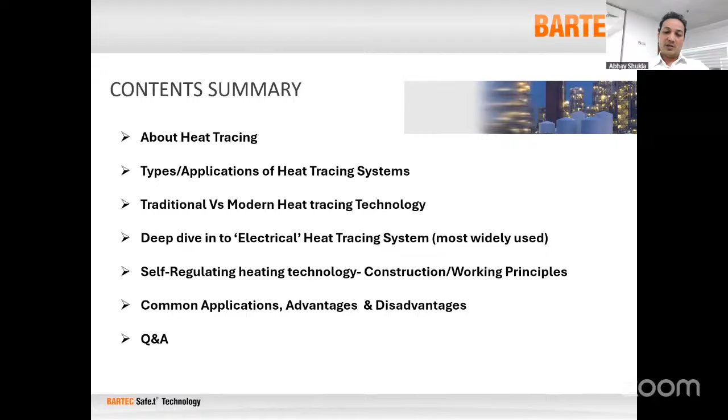So whatever heat is lost to ambient is compensated with the heat tracing system. As you know, there are many ways heat is lost to ambient: by conduction, by convection, and by radiation. Generally, when it comes to any process, like oil and gas, petrochemical, or whatsoever, when the process is under operating condition, generally heat loss doesn't happen, or it happens very negligibly. So there is no need to compensate that heat loss because there is practically no heat loss.

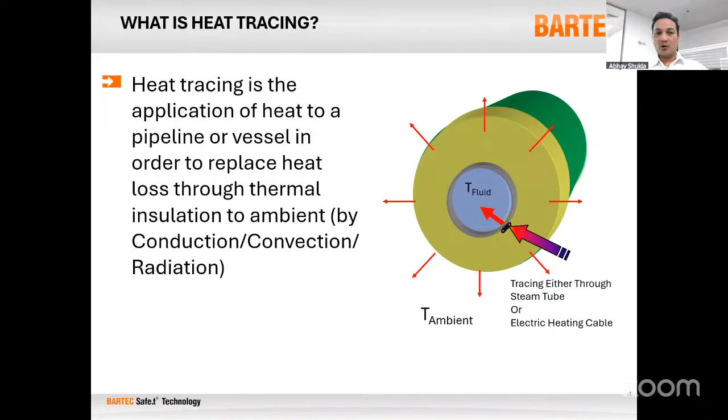Then the real problem comes for the process operators. That's where heat tracing comes into picture. So why is heat tracing necessary? It is necessary to compensate or replace the heat lost to ambient, and to maintain the fluids or gases inside the pipelines, vessels, or tanks at a desired temperature level, so as to avoid freezing and thickening of fluids.

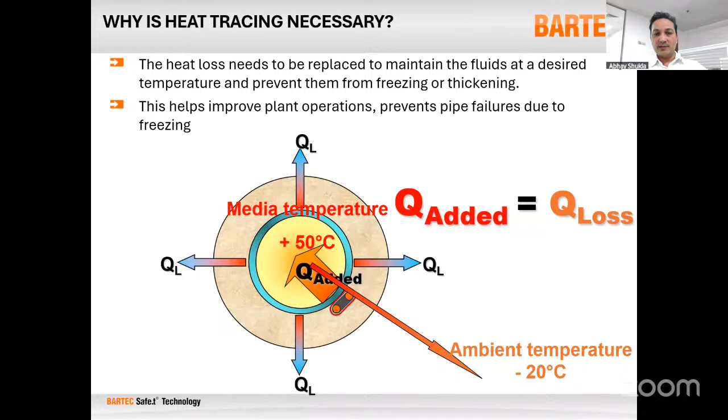So the ultimate purpose is basically to improve plant operation, to prevent piping failure due to freezing or any reason whatsoever. Now we'll see what happens with the process pipe over a period of time. These are two pictures which will give you a glance about when any pipe or equipment is heat traced or when it is not. With this, you can see a clear difference. When the process pipe is not heat traced, the heat is gradually lost to ambient and the temperature gradually comes down to ambient level, so the fluid becomes solidified, maybe within a few hours only.

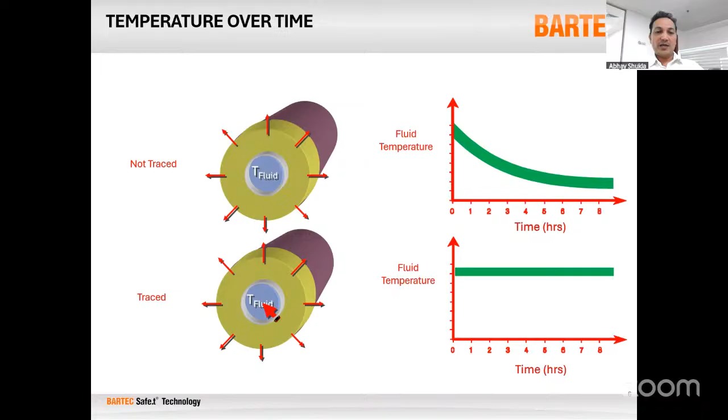But if we are providing a heat tracing solution to the process pipelines, then the heat tracing system keeps on maintaining, by compensating what is lost to ambient, the temperature throughout the operation. So it is ensured that the same temperature desired to keep the fluid in flowing condition is maintained throughout the operation. That is the whole purpose. So you will understand the uses of this heat tracing system and how critical it is when it comes to maintaining the operation of any plant, whether oil and gas refineries, any industry, petrochemical, pharmaceutical, or otherwise.

Heat tracing is not complete when there is no insulation, because no matter how much heat you provide from outside, if there is no conservation of the heat, it will be lost to ambient. So insulation plays a very important role in this - it actually preserves the heat. Whatever heat you provide to the process pipe or equipment is protected with the insulation.

With this chart, you will easily understand the difference between providing thermal insulation on a heat traced pipe versus not providing it. If it's a bare pipe with no insulation, the heat loss for a typical 2-inch pipe maintaining 55 degrees C, with ambient at 0 degrees, will be approximately 500 watts per meter - even if ambient is 20 or 40 degrees, heat loss still occurs since ambient is less than the required temperature. Eventually the pipe temperature will reach ambient temperature. Within a few hours, the pipe will become colder and the fluid inside will solidify.

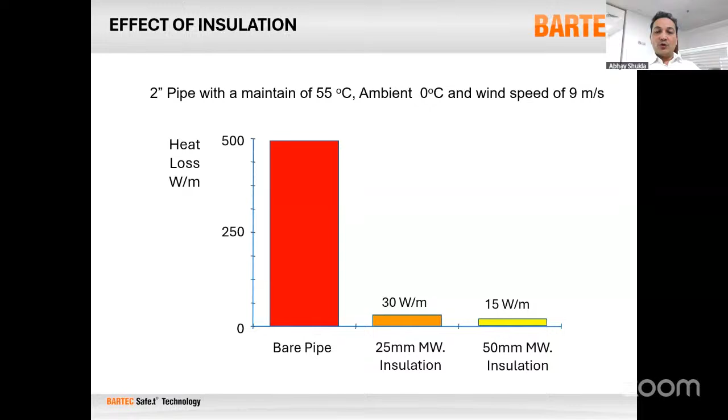But as you know, there is no insulation that prevents heat loss 100% - there is no perfect insulation in this world. There are different insulations we use, but even with insulation there will be some nominal heat loss, because of the K value of the insulation. Even with a good insulation like polyurethane foam (PUF), the K value is around 0.022 watts per meter degree Kelvin. So there will eventually be heat loss happening - it will be very slow, but after a few days, because of that nominal heat loss, the pipe temperature will gradually become the same as ambient temperature. But thermal insulation obviously plays a very important role - it prevents heat loss and reduces the requirement of heat tracing to a major extent.

How do we calculate heat loss? There is design engineering involved in this - how we determine which heating system to use, and how much heat is required to compensate. For that purpose, we need to calculate the heat loss from any surface. There is a formula: 2 pi k delta T, where T is process temperature minus ambient temperature equals delta T, divided by the natural log of d2 upon d1. d2 is the overall diameter over the insulation, and d1 is the pipe diameter. So the thickness of the insulation matters a lot in this calculation.

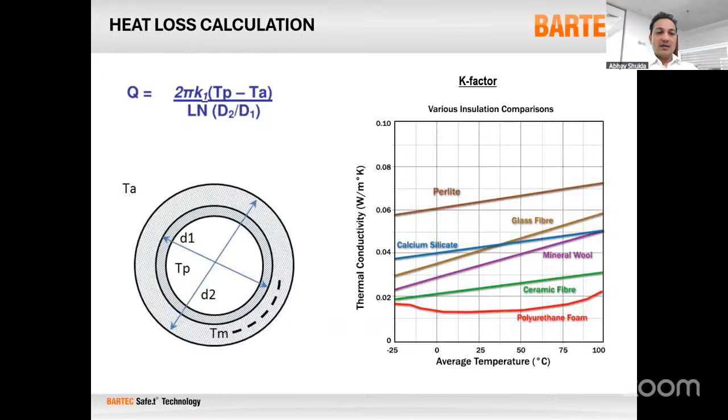Now, what are the applications? There are different uses for different mediums. For liquids, the purpose is basically to prevent freezing and to reduce viscosity so as to keep it flowing. For powders, the purpose is to eliminate condensation from the walls of equipment that could potentially clog the pipelines. And for gases, the idea is to prevent formation of hydrates. So for different mediums, there is a different objective for heat tracing applications.

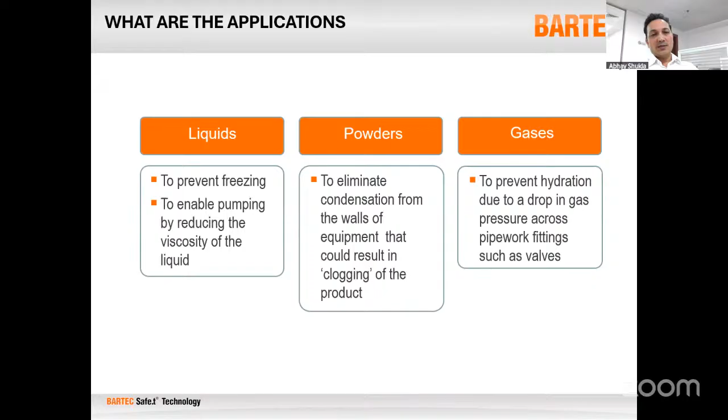So we choose the application and choose the system based on the requirement. Now I will give you an example of some market sectors where all these special applications are used, mainly in oil and gas. 70 to 80% are used in oil and gas sectors, especially in upstream, midstream, and downstream operations everywhere, be it storage terminals, refineries, distributions, and transportation.

Because when we talk about crude oil, let's take one example to make it more clear. Crude oil, which we often hear about from media and news channels, is something at, let's say, 60 degree C temperature. The viscosity is less, so it's very easy to pump it and transport it from one place to another. But when the temperature goes down from 60 degrees C to 50 to 40 degrees C, it starts becoming viscous, so it becomes very difficult for plants to pump and transfer it from one place to another. So it is extremely essential to keep the temperature of crude oil always above 50 degrees C, bare minimum. So 60 is ideal, but minimum 50 is desired.

So if you want to maintain the temperature at 50 or 60 degrees C, there has to be a system to keep it at that same level, right? Because depending on the location, if it is India, the least temperature we experience is maybe 5 or 10 degrees. But for colder countries, this goes to sub-zero temperature. So for different countries and applications, the requirement changes and becomes more complex, probably requiring more heat to compensate. But the desired temperature always remains the same depending on the type of application.

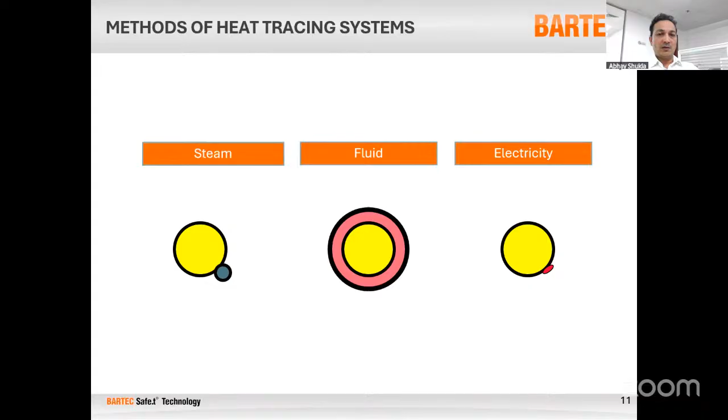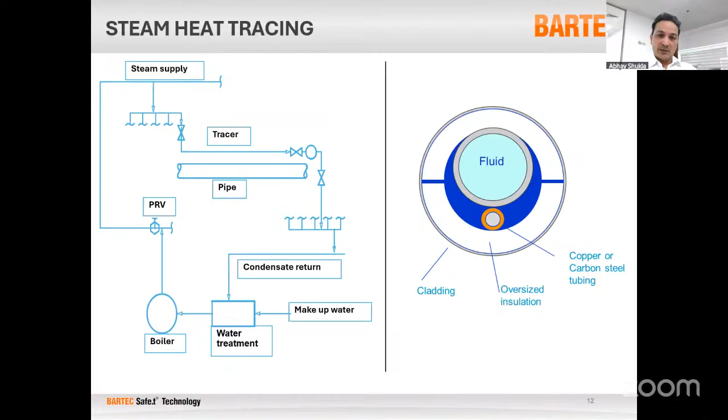And the typical arrangement is like, on the process pipe we attach a copper or carbon steel tube, which is welded or strapped to the mother pipe, and within that process tube we actually pass the steam. There is thermal insulation on top of the pipe as well as the tube to protect the heat. So that is how the typical arrangement is.

And with steam heat tracing, as I mentioned, there are so many disadvantages rather than advantages. As in the picture you can see, heat transfer is the major concern in this case, because the heat transfer coefficient really cannot be precisely calculated, how much heat is being transferred to the mother pipe from the steam pipes. So it becomes really challenging for the engineering person to calculate how much heat is required and how much is actually being transferred.

Apart from this, steam is useful only in cases where it is easily available as part of the process. Where steam is not available in the plant, it becomes even more difficult to create new infrastructure to generate steam. And as mentioned, steam is not useful for maintaining narrow band temperatures. It is probably useful for medium and high temperature applications, but not if you want to protect something from freezing, where you need to maintain just 5 or 10 degrees. You cannot do that with steam, so it becomes a real challenge to find a solution for that.

The disadvantages are many: it is difficult to control, cannot be very precise, it's very complex, and condensation, drain back, and water quality are all issues. As mentioned, there is high installation and maintenance cost and high risk of injury, because steam can be at more than 190 degrees C, and it's very prone to leakage and accidents.

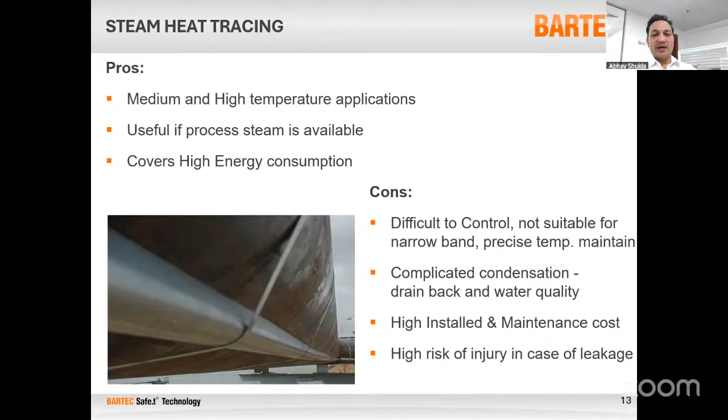So it becomes very risky to handle steam. That is why this system is now obsolete. No industry is now using steam heat tracing systems to maintain process temperature. Only where they already have steam available do they somehow utilize it for maintaining process temperature, otherwise it is wasted. Otherwise, this technology is obsolete everywhere.

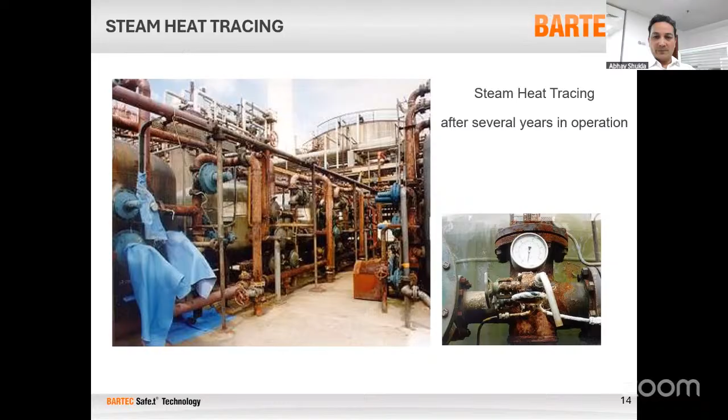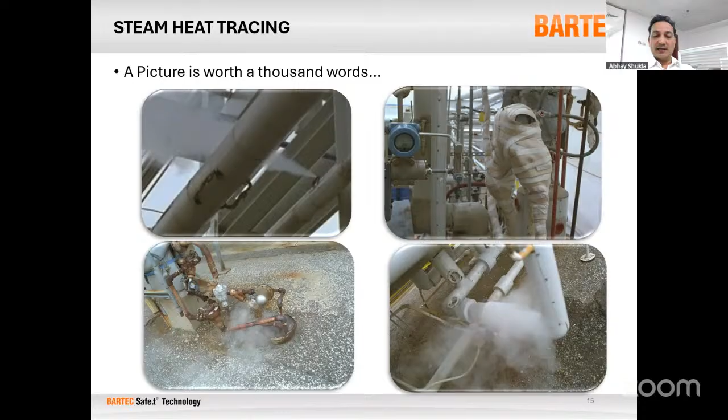Here are some pictures, real pictures taken from the sites. A picture is worth 1,000 words—you can understand how difficult it is to contain, right? Somehow people are managing it, but whenever we visit any customer, we try to convince them to use electrical heating technology, which is the latest in today's world. Here are some more pictures which will give you an idea of how difficult it is to maintain and live with a steam tracing system.

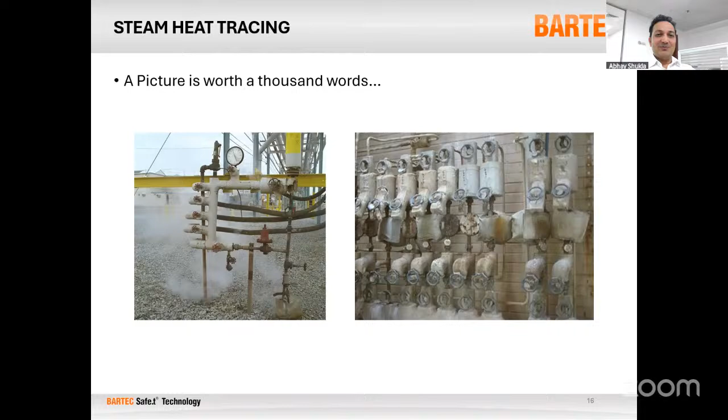Now we'll talk about the hot oil system. This system is totally obsolete—nobody is using it. But just to throw some light on it, let me mention the typical pros and cons. This works through hot oil. The heat transfer coefficient is probably better than steam, but it's very difficult to handle the oil in day-to-day operation. There is also the possibility of it solidifying and becoming viscous, so it's very difficult to handle the oil day-to-day.

So practically it is not possible, and that's why people have stopped using it. Again, precise temperature maintenance is very difficult in this case, and it is not environmentally friendly at all. There is leakage risk, injury risk, and expensive, complex equipment. So this system is no longer used—I would say hardly 1% of industry is actually using this kind of system.

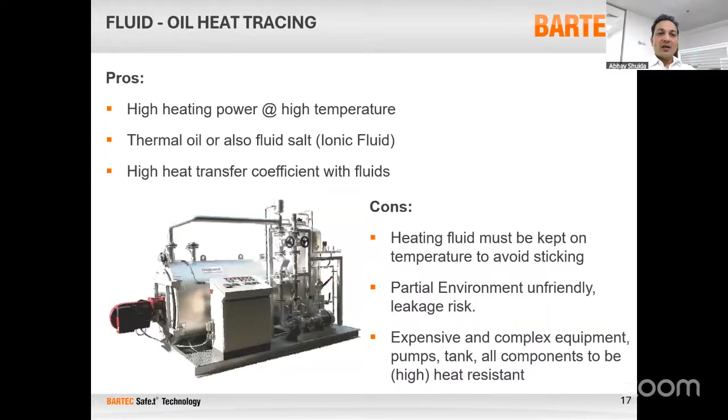Now here comes the electrical heat tracing system, which is the core of this particular session. We will talk about the electrical heat tracing system in detail. We'll try to understand what the components are in this system, how it works, what the technology is, and how it is economical compared to the other two systems. Basically, the electrical heat tracing system consists of not just one particular product—it consists of many products and systems together. That is why it is called a system, not a particular product.

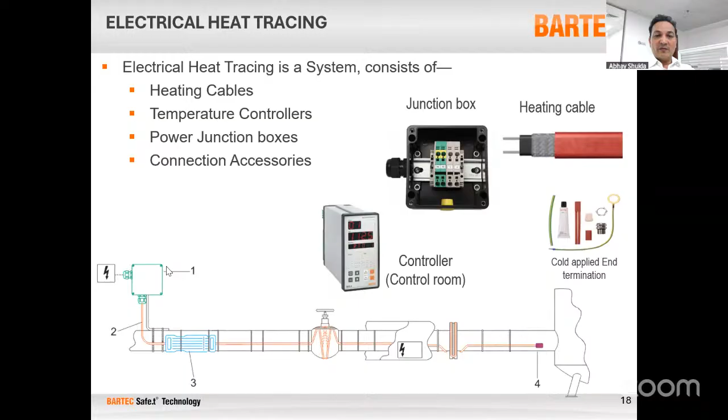Electrical heat tracing consists of the heating cable, which is the main component of the system, followed by the temperature controllers. The temperature controller depends on what kind of temperature we want to maintain in the system and how precise we want to maintain it. Then, of course, power junction boxes, which are required to feed power supply to the heating cables, and connection accessories. This is a broad overview of how the system looks.

You can see here there is a process pipeline with valves and flanges. Then we place a junction box on the pipe itself, which is to be heat traced. This is the pipe which is to be heat traced, and we place the junction box there.

Take out the heating cable. It's a flexible cable, so it's quite easy. You can cut it to whatever desired length you want, and then wrap it around throughout the pipe. And by using an end seal, you can terminate the circuits, and there you get indication through a light whether the circuit is on, off, or faulty.

So you can monitor as well in real time. There are so many systems where you can monitor the real time temperature of the pipeline, set the point of the process temperature, and control the system through DCS or control rooms at one place. And there are so many systems available nowadays where you can install software on your PC and monitor your entire process, entire plant remotely from one place, and give a command to control or trip the circuit remotely.

So on a real time basis, you can monitor the temperature, do health analysis of the entire system, and actually predict the maintenance requirement for the system. Although a whole kind of infrastructure is there behind it, this is quite simple. You require just simple distribution panels for feeding power supply, simple junction boxes, and easy to use cables. That's it, not a complex system.

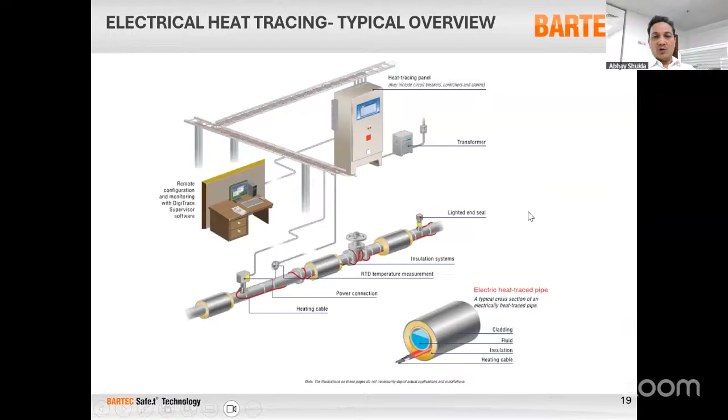So why use electrical heat tracing system? Why are there advantages over other systems? As you know, electricity is everywhere and it is easily controllable. You can control each and individual circuit, each branch, each section of the pipeline independently. So that flexibility you get.

Long line applications, cross country pipelines - it is quite easy with electrical heating system to maintain the process temperature of cross country pipelines for more than 20 kilometers. When I was working with nVent, we did one project in Barmer for 680 kilometers of crude oil pipeline for IOCL. We provided heat tracing on such a long pipeline, and that was a Guinness Book of World Record.

680 kilometer pipeline, of course, is not possible in a single circuit, but that was a different technology, and 20 kilometers we covered in a single circuit. Single circuit, when we talk about it, means one single junction box, one single end seal, and one single system - one transformer, one panel, one junction box, and one controller for the entire 20-kilometer pipeline.

So imagine, with this technology, how the overall heat tracing system for such a long pipeline was made so easy that it is still running. This was commissioned in 2011 or so, and it is running perfectly fine, with no need of any maintenance, because the 680 kilometer cross country pipeline runs through desert - you cannot keep going there for maintenance purposes, you cannot keep monitoring those lines. So you need a system where you can remotely monitor the entire pipeline from one place. That is where this beauty of electrical heat tracing comes into the picture.

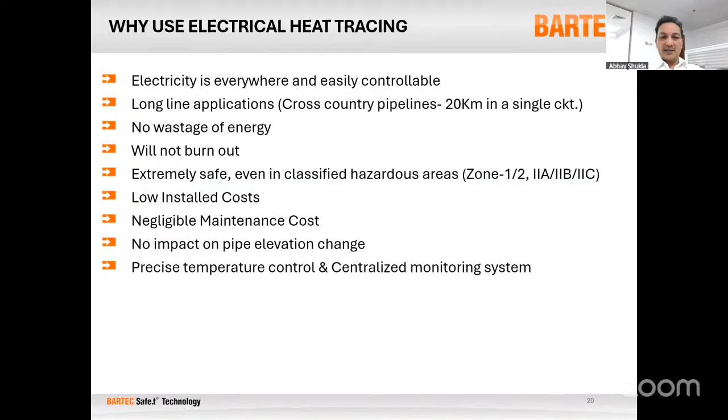So there are different types of cables available for different types of uses. But the most widely used cable in the electrical heat tracing system is the self-regulating heating cable. This covers more than 90% of the applications worldwide. It's so easy and convenient that almost 90% of plants and machinery actually use this kind of system.

Other systems include series resistance heating cable and mineral insulated heating cable. There's another one called skin effect heating system, but we probably won't cover that in this session. Skin effect heating is basically applicable for very long pipelines, like the IOCL Barmer pipeline, 680 kilometers, which was only possible with skin effect heating technology. So that's an altogether different technology.

That technology is only for pipelines greater than 20 kilometers in a single circuit. But 90% of industry requirements are fulfilled with self-regulating cable, in some cases series resistance, and in few cases mineral insulated heating cable. Mineral insulated is used for very high temperature applications, probably for aluminum factories, where you need to keep the temperature above 600-700 degrees C. There, mineral insulated cable comes into the picture.

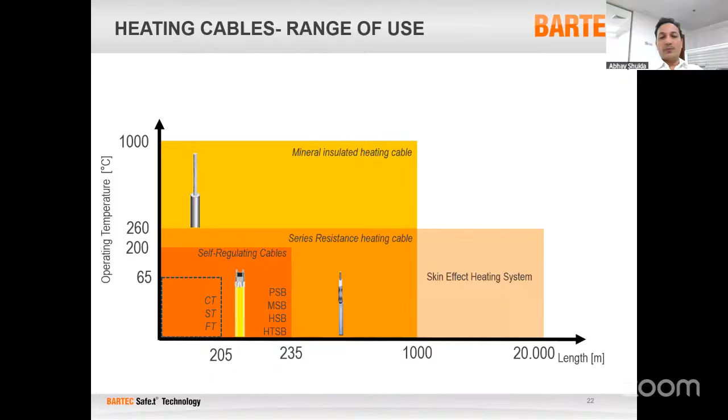Now we will dive deep into self-regulating heating cables, about its construction, and then we'll learn about how it works, and then probably you'll be able to understand more about the self-regulating technology.

Self-regulating heating cable is basically the most intelligent cable of the entire heating cable family. As I've been emphasizing, the word intelligent is used because this regulates the power output in response to the temperature. We will learn in the next slide how this regulates the output in response to temperature. But first, let's understand the construction of the heating cable.

So the heating cable construction you can see here - the main thing here is basically the carbon polymer core. This is the base of the heating cable. There are two parallel copper conductors, nickel-plated copper conductors, which are embedded into the self-regulating polymer core, which is the main engineered polymer used for the self-regulating property of the heating cable.

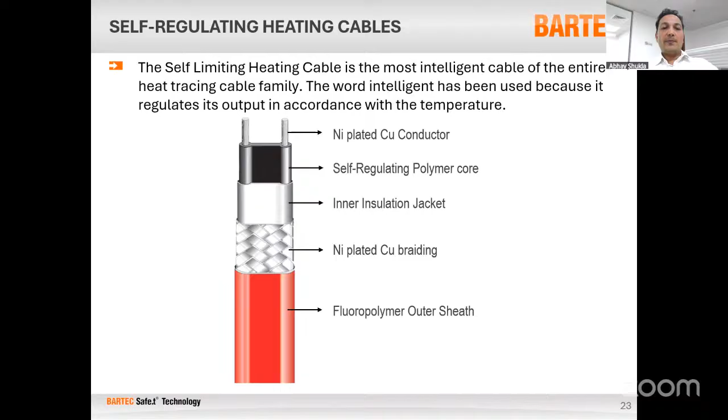Then we provide an inner insulation jacket for protection from heat, and then nickel-plated copper braiding for the earthing system, and then an outer fluoropolymer sheath for protection from mechanical damage. So this is the construction of the typical self-regulating heating cable, although it varies depending on which kind of self-regulating cable we're using, depending on the application and temperature.

Now here comes detail about the matrix or core we're talking about. So what is magical about this matrix, which regulates the power output with respect to temperature?

So basically, this is a semi-conductive polymeric material, which is a polymer mixed with conductive carbon. So this has got PTC characteristic. Because of that characteristic, when the temperature of the matrix goes up, the resistance goes up. So that is what comes into picture.

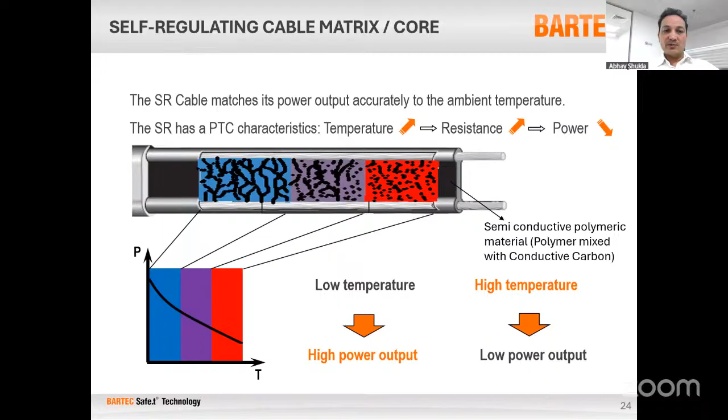This was invented in 1970 by a US company, Radiation Chemistry, known as Raychem. When I started my career, I joined Tyco Thermal Control. Tyco Thermal Control was basically owning the Raychem brand name. They were the inventors of this self-regulating technology in 1970. Since then, it is being used, and nowadays almost more than 80% of the electrical heating systems are with self-regulating heating cables.

Now we will learn about the benefits of self-regulating cable. As I mentioned before, it is a very safe solution. No overheating. Why no overheating? Because there is a limitation in how much heat can be produced by a particular heating cable. This is engineered in such a way that maximum output per meter is fixed for every type of heating cable.

There are cables which come with 10 watt per meter output, fixed output throughout the length. But again, there is a limitation in maximum circuit length. Let's say one type of cable can go up to 200 meters. So up to 200 meters, the power output remains the same. If you increase the length to 250 meters, output will get reduced. So in order to keep the same output throughout the length, the maximum circuit length criteria has to be met.

So no overheating, even if we cross over heating cables, why is there no burnout? Because by concept itself, when you overlap two heating cable circuits together, at the crossover the temperature goes up. When the temperature goes up, the power output goes down. So automatically that particular crossover section where the heating cables are touching each other becomes eventually colder. So there is no possibility that the crossover will turn into a burnout case. No, because the power output of that section will come down, so the heat produced by the heating cable will come down. So there is no possibility that the heating cable crossover will burn out. So it is extremely safe.

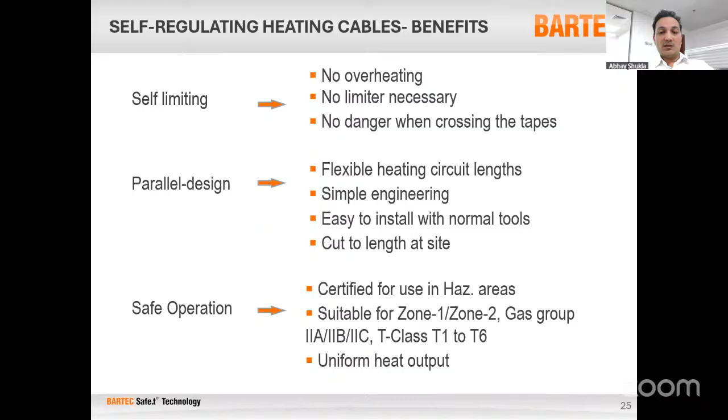Hazardous area classification in oil and gas industry, or any industry for that matter, divides the area into different zones and different gas groups. For gases, it is represented with zone 0, 1, and 2. For dust atmosphere, like sugarcane industry or wherever carbon dust is present, it comes in zone 20, zone 21, zone 22. For oil and gas, where gases are present, we classify it zone 0, zone 1, and zone 2.

What is zone 0? Zone 0 is basically the area wherein the hazardous or explosive gases are present almost all the time during operation. For example, at petrol pumps, when you open the nozzle to fill your car's tank, the surrounding area where petrol comes out of the nozzle is called zone 0, which is extremely dangerous. Even with the slightest energy, this will ignite. So it's an extremely hazardous area, called zone 0.

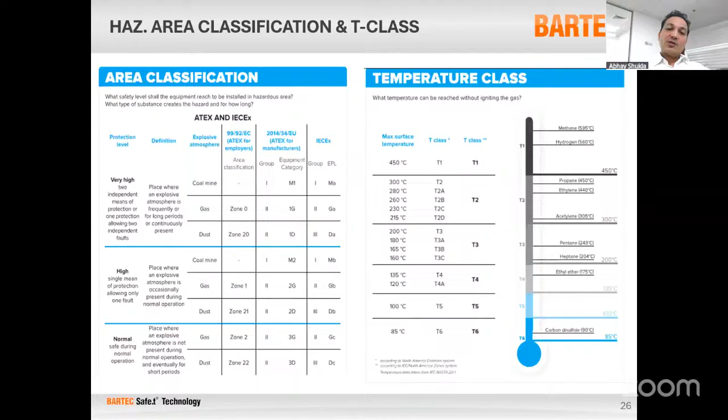This is extremely safe for use where your system is certified for T3, because your system is capable of handling up to 200 degrees C. Let's say your process system has certification to sustain up to 200 degrees C - you can very well safely use a T6 system which generates maximum up to 85 degrees C. But on the other hand, if your system is T6 and you use a T3 cable which can potentially increase temperature up to 200 degrees C, it is extremely dangerous. So this comes into picture while selecting the appropriate cable, depending on the area classification of a particular industry and what kind of components they use.

How do we classify this? These go from low performance to high performance - when it comes to temperature service, from low to high temperature, in order of increasing heating output. PSB can maintain up to 65 degrees C. MSB can maintain up to 135 degrees C. HSB can maintain up to 200 degrees C pipe temperature. If your process requires maintaining 200 degrees C, this cable can maintain that, which means it can also be used for 135 degrees since it covers up to 200. For HTSB, you can maintain up to 250 degrees C.

There are different cables with different outputs and constructions, depending on the cross section of the conductor used, the thickness and width of the matrix, and the amount of material used in the matrix - all these factors come into picture when selecting the appropriate cable for the required temperature. The outer sheath is also made for that purpose - for high temperature you need a very rugged, high temperature sustainable sheath. We usually use fluoropolymer for high temperature and polyolefin for low temperature cables.

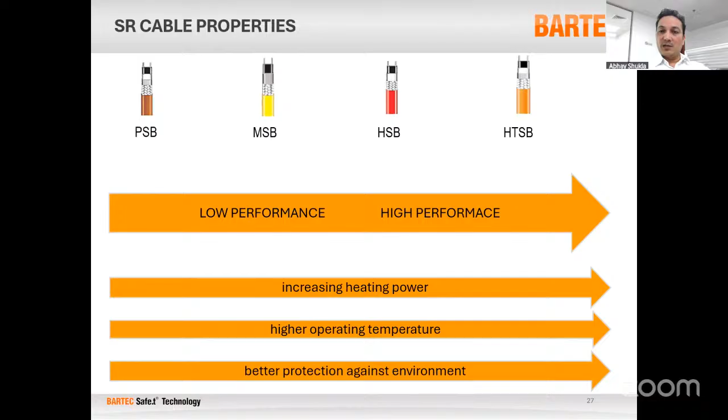As I already explained, this is how we classify the cables and how the temperature classification works - PSB is certified for T6. You must be curious why 'EX' is mentioned. EX is basically a symbol used for explosion proof or hazardous area safe components, meaning if a certification has this marking, the product is safe for use in hazardous areas.

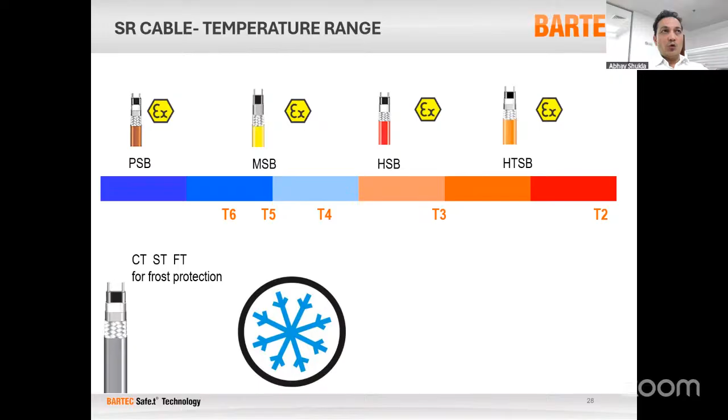These cables are used for frost protection as well, for example water pipelines you want to prevent from freezing. You can use a very low output heating cable which will just keep it warm to maintain 5 degrees C. Even low temperature cables are available, like the gray one. This very low temperature cable is basically used for frost protection only, used for cold countries. This very low output cable is used for water pipeline, gutter de-icing, roof heating, floor heating, and so many purposes.

But see the self-regulating cable, it's a very thin cable. I'll give you an idea about the thickness and dimension of the heating cable we are talking about. It is a flat cable basically. The width starts from 10 mm up to 15 mm max, and the thickness is 4.5 mm to max 5.5 mm. So that is the dimension we are talking about.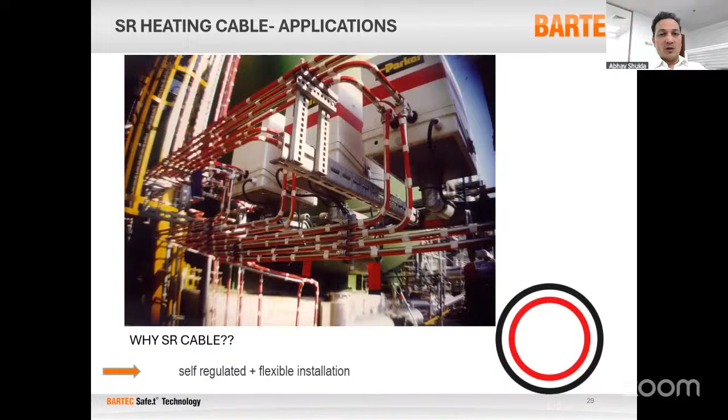It's so thin you can literally install these cables on even 0.5 inch or 1 inch tubes or process pipes. So it's very easy, it's flexible, you can install it very quickly, and the contact area is of course better compared to steam tube installed on the process tubes. These are some more examples you can see.

On pumps, you can see how precisely and neatly this cable is used. This particular cable is the EKL cable, basically a series resistance cable, a thin cable which is used for low temperature maintenance for long lines. This gives very low output. These are basically mineral insulated cables, fixed on a very large tank requiring very high temperature to be maintained.

This temperature maintenance is all done with self-regulating cables for storage terminals. This is again a mineral insulated cable for very high temperature requirement, fixed on the wall. And on a motor, you can see this example of another self-regulating cable fixed on the motor. You can see the bending radius of this cable, it's so flexible you can literally bend it up to 15 mm, so it's very easy to install no matter what surface you have.

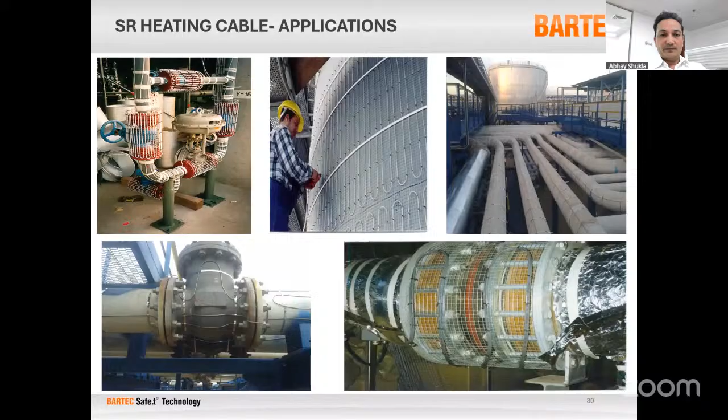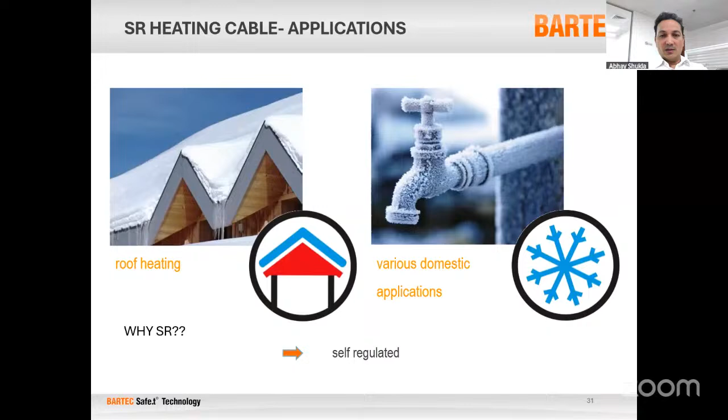As I mentioned, this is used for roof heating and water pipelines, but those are low temperature heating cables used for domestic applications. Now the other heating cables I was talking about, I'll briefly go through, because these are anyhow very rarely used. But these come into picture when it comes to long pipelines and temperature maintenance up to 260 degrees C.

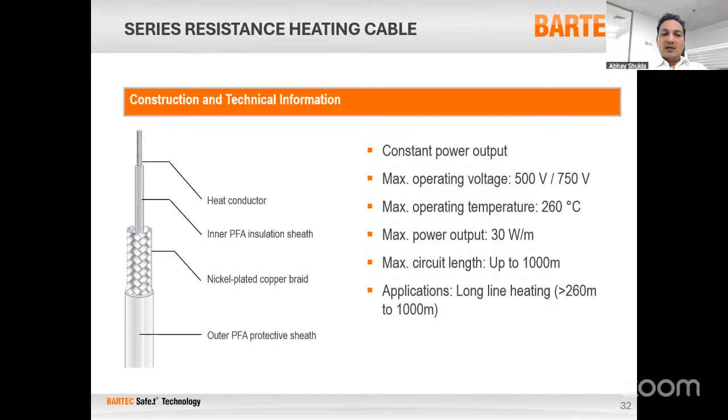The advantage of this system is that it gives a constant power output. This is a series resistance heating cable where just a single conductor is there, and it gives a constant power output throughout the length. Of course, with the change in the length of the cable the resistance varies, and then the power output would vary too, but this gives a constant power output. In the other case, self-regulating, the output is actually variable, it regulates the output with respect to the temperature. In this case it's a constant output, meaning our power output doesn't change with change in temperature.

Then mineral insulated cable, which is used for very high temperature applications, like in aluminum plants, where you require 500, 600 degrees C or more. There, mineral insulated cables come into picture. The advantage is that this also gives the same output, so it doesn't vary with change in temperature. This can go up to 1000 degrees C, very high power output, very long length, and this is applicable in case of high temperature and high long length pipelines. This is slightly inconvenient because of the construction, since the outer sheath is basically a metal, sometimes copper, sometimes aluminum alloy.

So the construction is very simple. There is an outer sheath made of aluminum alloy, stainless steel or aluminum, and inside it there is a heating element and magnesium oxide as insulation.

This is inconvenient because the bending radius is not that flexible, so it's less. This means you cannot install it on lines going through different curves. So this is good for straight pipelines or larger diameter pipelines, but not suitable for small pipelines.

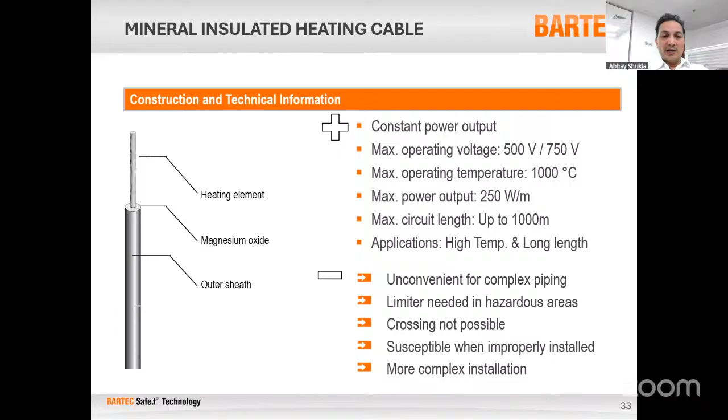Now we will talk about connection equipment and controllers. The heat tracing system consists of several components, not just a heating cable. The heating cable goes on the pipe, then connects with different junction boxes, controllers, and other system components.

The heating cable, self-regulating specifically, regulates power output with respect to temperature, so there is no need for a controller. But when it comes to saving energy - if you keep the heating system running, although it consumes less energy when it doesn't need to maintain temperature, it consumes more energy when more heat is required. Even if there's no requirement for heat on the process pipeline, some energy will still be consumed because the system is continuously on.

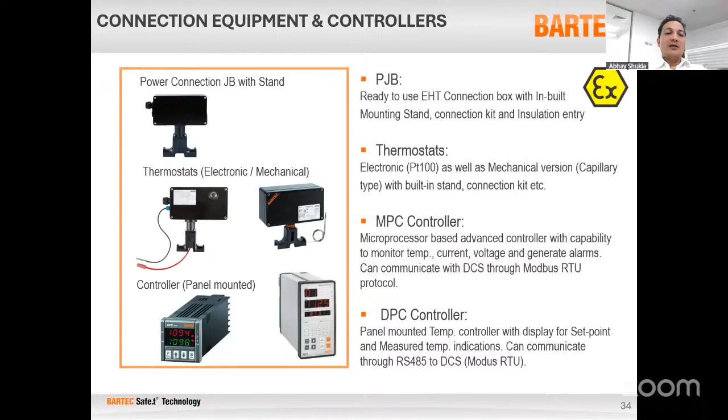So in order to save energy and precisely control temperature for critical applications, we use controllers. There are different controllers from different manufacturers. Some controllers we place on the pipeline itself - I will show you this in the next slide.

There are some smart controllers which can communicate through Bluetooth. You first configure it in the field, and then all the data comes through the software to the control room, through the Modbus RTU protocol, and then through RS-485 cables.

So to the control room, and from there you can read the real-time temperature, the set point, and fault information. You can get fault alarms to the control panels, automatic trip, or there are two kinds of systems we can use: fail safe, safe to trip, and another system where you can keep it on even in case of fault. There is a switch given - you can set it to switch off the system in case of failure, or switch it on even if there is a failure, depending on your requirement.

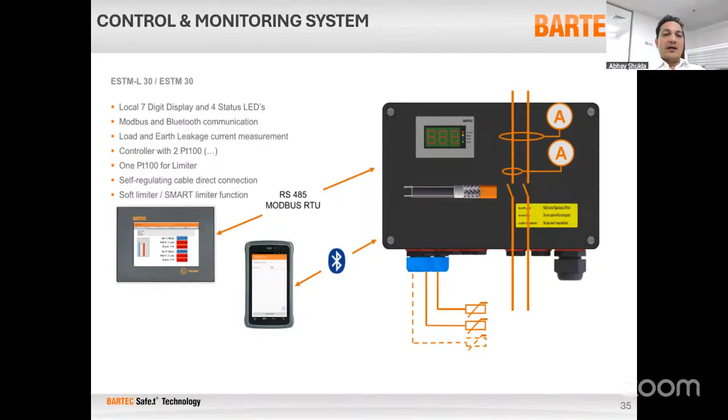These are called smart devices for advanced monitoring and control of the system. It becomes quite easy for the maintenance and operations team to keep an eye on the system, to keep it checked, and to keep it maintained.

We'll also talk about the software, because the system nowadays is so complex - the pipelines, the instruments, because it's not just about pipelines. There are many equipment in the circuit, instruments like pressure gauge, temperature gauge, level gauge, and many vessels and tanks in the system. Because of the complex nature of the pipelines, it's very difficult practically to design the complete plant and provide a heat tracing solution.

So how do we do that? We have a software where we put all the parameters. We import the isometric drawings from the 3D plant model directly into the software. We get a complete overview of the pipeline, the arrangements, and the isometric view, and then we decide how the circuit is to be formed, how many circuits are needed depending on the complexity, which section is to be a separate circuit, and which sections can be merged into a common circuit. This is all about optimization of the system.

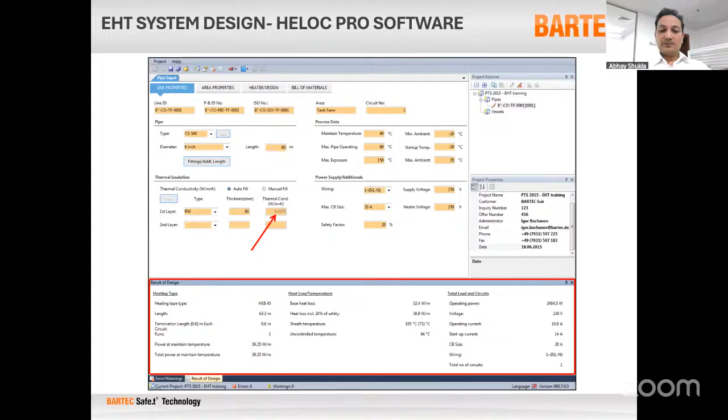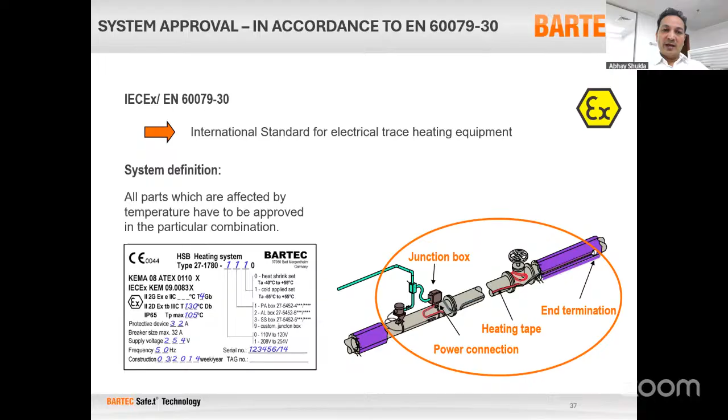As I mentioned before, the system is safe for operation in hazardous areas, but there is a system to certify it. There is an international body who actually certifies the system for use in hazardous areas. In our case, the entire system is approved by international bodies, and all these products are actually proven on international standards for heat tracing equipment.

This is just an example of certificates issued by the international body. We call it ATEX. IECEx we also have. These bodies are international bodies who actually certify your products for use in hazardous areas. So this is a combination of tests and different international standards.

We call it IEC 60079. So IEC 60079 is the standard which is used for hazardous area selection of equipment for use in hazardous areas. All these components are actually designed and used and certified following that international standard.

Again, there is another international body, which is IEC. They give IECEx certification. ATEX and IECEx are most widely used all over the world. In India, there is PESO certification, which is basically issued by the authorities based on ATEX and IECEx only.

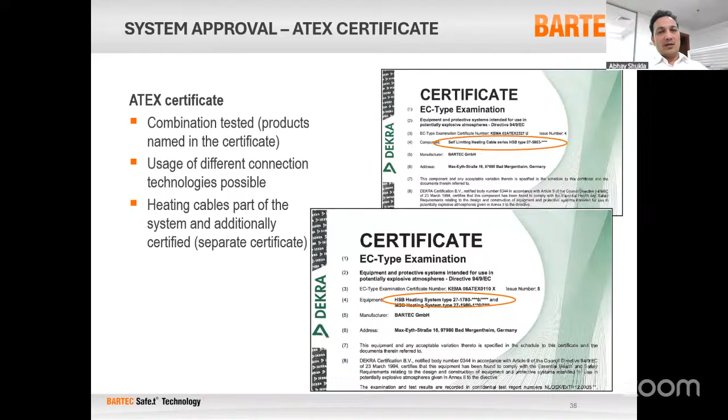So if you have ATEX certification from an international body, you submit these certificates to the authorities and they will give you PESO certification, which is used for Indian petroleum industries. But the basic concept behind these approvals is IEC, IECEx, and ATEX certifications, all based on IEC 60079 standards.